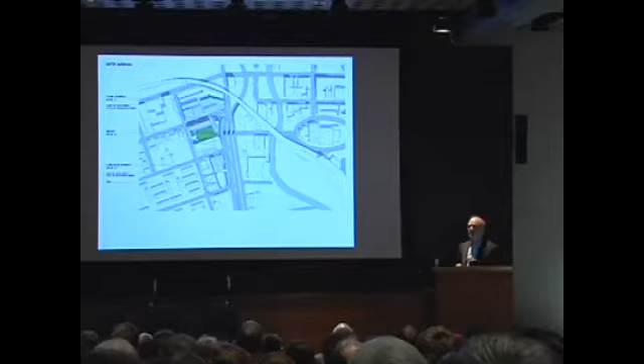And so the challenge is to think about the complexity of the situation, and think about the ways that cultural institutions can be brought together with residences, which can be brought together with landscape.

And here we see a proposal for CNY done by Koning Eisenberg, a kind of master planning idea for the near West Side, just along West Street. This sits right against the area which we call the Horseshoe, which is about 200 properties with many different kinds of housing stock.

And the competition entries, which you'll see downstairs and later on today during the presentation, are meant to go in those empty lots. And so Case Supply, which is one of the larger footprint buildings, is about 220,000 square feet.

There have been many, many ideas. Some of them have to do with using local food culture as a spur for economic revitalization. This is an image done by students at the School of Architecture with Brad Lynch.

Or this, another project which will in fact be done by Brininstool and Lynch of Chicago for the Lincoln Supply Warehouse. We see the green screen as an icon for a neighborhood which has now been dubbed SALT, a reference to Syracuse's history in producing salt, but also speaking to the unity of lifelong learning, design, arts, and education within this neighborhood.

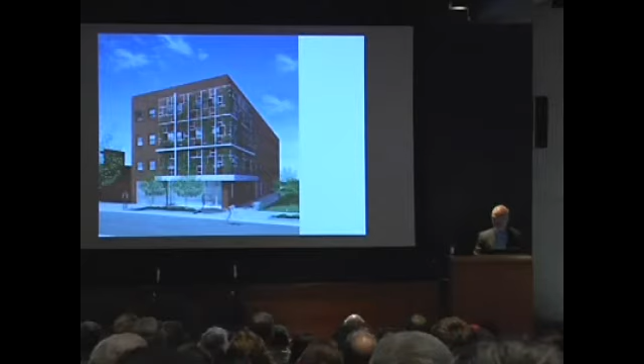Similarly, students have begun to think in more profound ways about sustainability. This was a project done with students, this is Rachel Kenny's project, in a class about the ways in which renovations can be done in a more sustainable, technologically advanced way.

And this is meant also to feed into the larger notion of what we can do on the west side through a CAR-T grant, through Ed Bogucz, the College of Engineering. Tim Stenson has worked on proposing energy-efficient houses that would go on the west side.

Or this, the Info Center by Lubrano Ciavarra, which we hope to be really a center or a hub for the kind of activity that'll happen on the near west side. This is a proposal, and this project will be going forward as well, we hope, in the near future.

But that brings us to the competition, and I won't say very much more about this because you will see all of the kind of remarkable, challenging work that our designers have done.

The notion was to see if we could bring together affordability with newer technologies, and also think about the ways in which we could approach the complexity of the post-industrial city and dealing with the rough edges of a city like Syracuse.

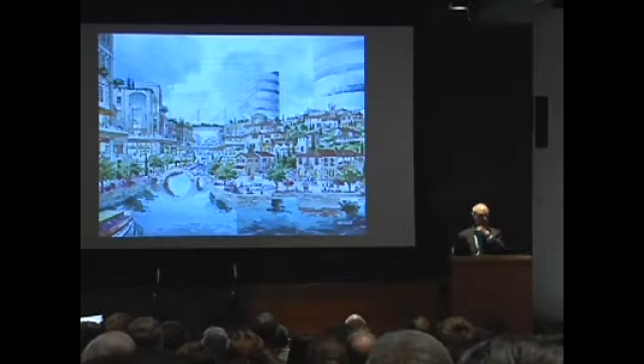This is our neighborhood. This is us, and it's very multiple. We have buildings that look very, very different. We have people that look very, very different. It's an authentic mix, and it's this kind of vibrance that we hope to maintain when we begin to do those additions.

Of course, we all love these wonderful little Victorian houses, and there are all levels of proficiency in making a bid to historic architecture in the neighborhood.

The point here is that the vision of the West Side is multiple. We will continue to have Italianate houses and Victorian houses, and we will continue to have houses by Christopher Communities, by Home Headquarters, and by Habitat. But we will want to think about maintaining densities within the neighborhood, maintaining the adjacencies which are so critical.

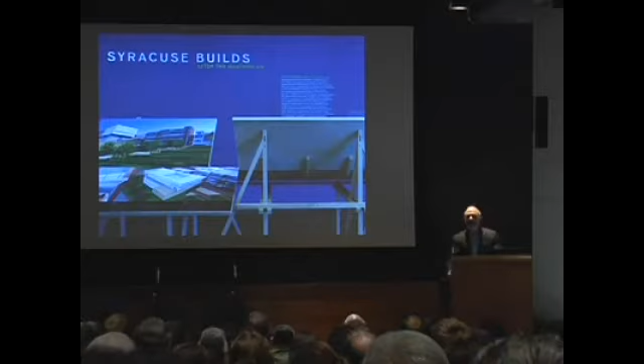I'll leave you with this. Just in the past 5 days or so, there have been articles about this housing competition that have shown up in papers in Milan, New York City, and Syracuse. This was an article that appeared last spring, and it had the rhetorical question: can architecture save Syracuse? And as much as I would like to say, as a Dean of the School of Architecture, a resounding yes, we know that the answer is much, much more complex.

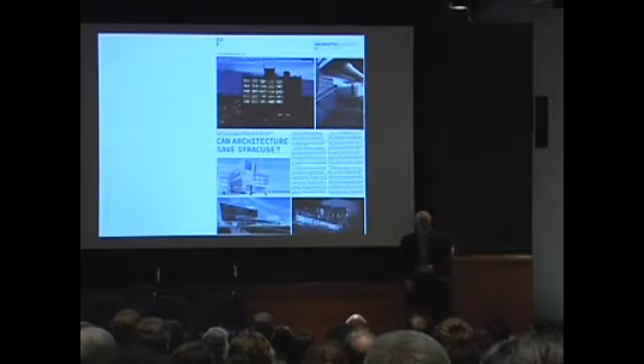What I hope is that we all leave today thinking about the ways that each one of us can participate in changing our cities and making them better. Thanks all for coming. I guess I should have clapped for me.

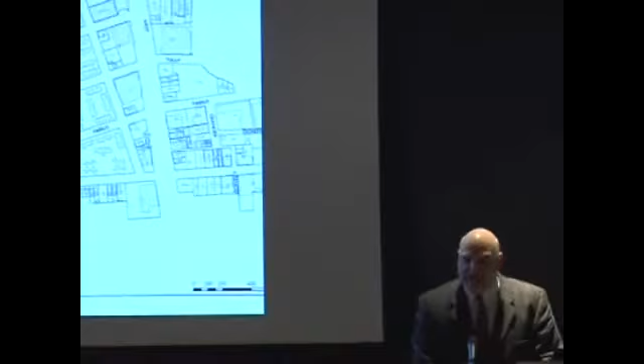In between those neighborhood assets, we had many residential properties that needed some tender loving care. Alice Mann is here, maybe you could raise your hand, Alice. Alice has been the principal architect of our neighborhood revitalization strategy in this neighborhood. Maybe calling her an architect is not appropriate in this setting, but that's okay.

When you're approaching a neighborhood revitalization plan, the first thing you've got to do is gain control of the properties. At this point, Home Headquarters now owns 71 properties in that area that we call the Horseshoe. Mike Hughes, who's also here with us today, is going to be handling most of the specs for the properties that would be renovated.

And it's pretty much an even match of new construction and houses that will be renovated.

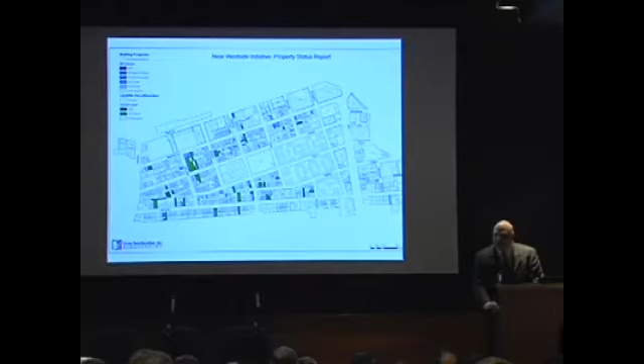But we haven't forgotten about the existing owner-occupants in that neighborhood, and we've provided a variety of programs to assist those owner-occupants, such as mini grants to give the house a fresh coat of paint or repair the porch. And working with the Center of Excellence, we've also provided these folks with assistance for energy conservation, doing energy audits on their homes and making those homes more efficient.

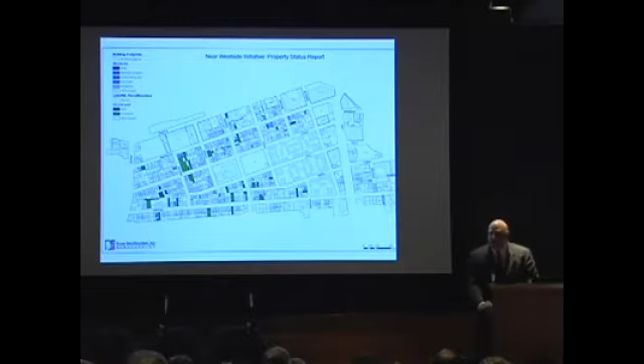Once these properties are done, both the new construction and the rehabilitation, they'll be marketed really to a combination of families and also artists. And rather than try to prescribe this, we're going to let the market play out and see how that works.

We were extremely excited right from the beginning to participate in this design competition, and now we're really anxious to go to the next phase, which would probably be to contract with the architects in question.

We committed early on that whoever won, Home Headquarters would actually build the properties. I think one of the architectural digests said they will actually build the damn things, and that's what we intend to do. In an attempt to control the costs and really improve the quality of construction, we've developed our own construction crew.

That's overseen by Dan Wright. Dan, maybe you could put your hand in the air. He's pretty shy, so I'll probably never convince him to do that. We've never found anything that Dan can't build, so I'm sure this would be no exception.

We have a core crew of 3, and Dan is also training a couple of apprentices, construction apprentices right now. And that's really a component that we'd like to do more of, particularly as we're going into some new technologies, some new designs, some new building materials. We'd like to employ more folks from the neighborhood, sort of getting in on the ground floor of this cutting-edge technology.

With that, I just want to say we're extremely excited to go forward.

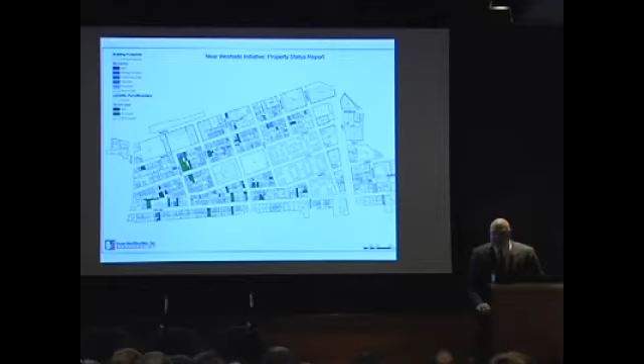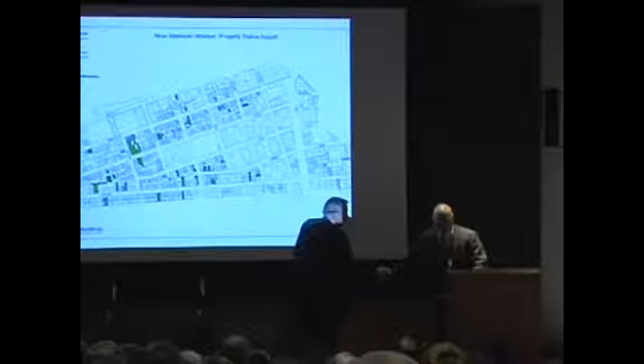So my name is Ed Bogucz. I lead the Syracuse Center of Excellence, which is an audacious enterprise that involves more than 200 firms, organizations, and institutions. This is a collaborative effort that goes back 12 years of folks coming together around the idea of creating innovations to improve urban environments and built environments.

Our partners focus on innovations in 3 areas: energy, indoor environmental quality, and water resources. And it's been really a privilege and a thrill to be involved in this project, and especially in the near West Side neighborhood.

At a high level, our mission is about promoting sustainability in the urban communities. The city of Syracuse was born in the near West Side, on the west bank of Onondaga Creek, by the first non-native settlers. And of course, this entire region is a sacred region to the indigenous peoples of the region.

So as we think about the near West Side neighborhood, we look at a region that was a vibrant urban neighborhood for 100 years, from 1840 to 1940, 1945. And the history of the neighborhood over the last 60 years demonstrates really the failed policies of the country in promoting sprawl to suburban areas.

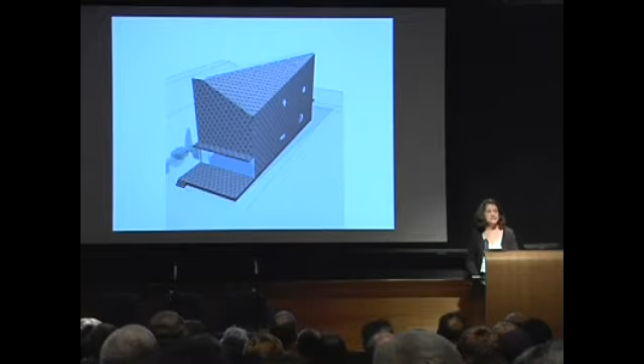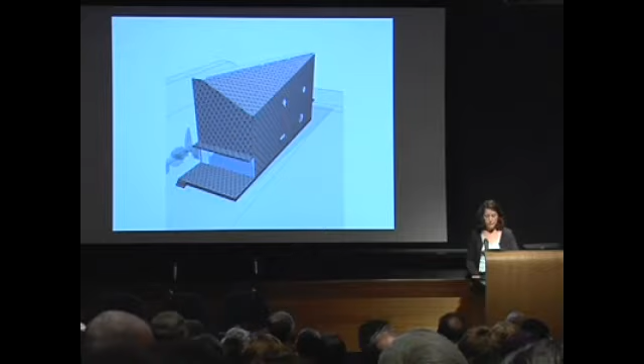The Adjaye Associates team proposes the asymmetric house, whose form is based on the transformation of a gabled structure typical of many single-family dwellings. It departs from this conventional form by advancing a monolithic structural system and a lighting strategy that directs daylight from a continuous skylight at the building's ridge line to all parts of the house's open spaces. The team refers to the house as 'a hot coal in the snow,' a metaphor for the house's thermal performance, based on thick exterior walls wrapped by a shell of clay tiles. It also proposes an underground heat exchange system that works with the Earth's ambient temperature to provide heat in winter and cooling in summer.

Inside, the concrete slab floor provides a robust surface for everyday life, and continuous glazing at the rear and front entries provides a strong relationship to the street and to the backyard.

The Erdy McHenry and Tim Stenson team's proposal is a creative response to their identified need to design what they call 2 houses in 1, as a way to manage the environmental challenge of both hot August days and cool February ones in our climate. To that end, their Lumen-Air House is what they term a machine for living.

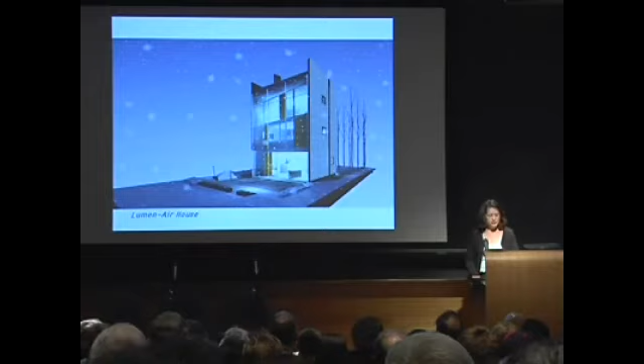In the warmer months, the house opens, flower-like they say, to filter sunlight and accept the free flow of fresh air. For the cold gray winter, it closes. The interior living spaces of the house are protected and insulated by thermal buffer zones.

Through this focus on weather-driven performance, operating costs, and an ambition to have the house form reflect its performance, Lumen-Air House aims to produce comfort, reduce consumption, save money, and important to the designers, tell its story.

To this end, the Lumen-Air House makes no pretense about blending in, at least in your immediate reading. Alternatively, the designers suggest a strategy that introduces a conspicuous, positive yet critical complement to the Near West Side, all the while complementing the housing fabric of the neighborhood. Finally, their project strategy contributes, they suggest, to the landscape of the city.

The front yard is designed to receive a birch tree bosque that, together with a green roof and rear yard cisterns, process all stormwater on site. Something we all know from the area that's important given our city's overly taxed CSO system.

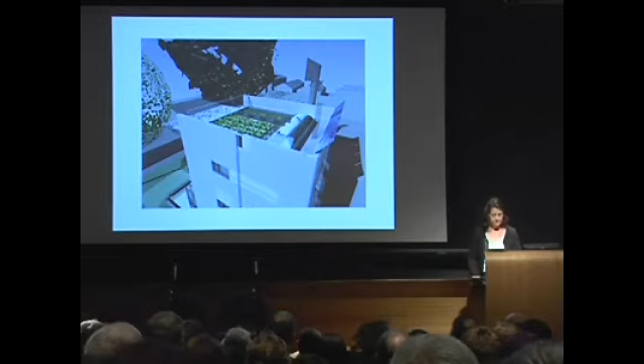The scheme by Office Da and Studio Hima addresses what the team identified as the most pressing concern of the competition: the ability to build a green single-family house for the allotted budget.

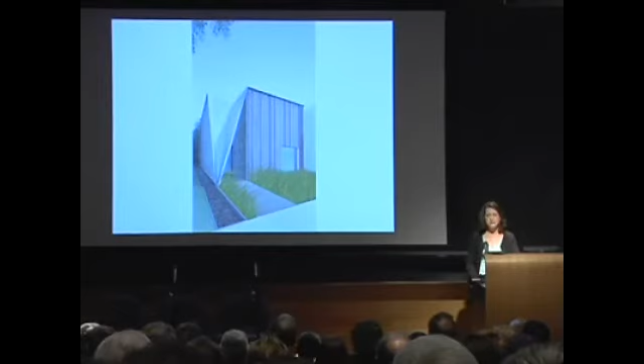For this reason, their proposal argues for what the designers call radical economies that revolve around the planning, massing, and material strategies that make what they say a dumb box smart. And perhaps most radical for some of us, completely eliminate the need for conventional heating and cooling by the use of a super-insulated building envelope.

To this end, the house is planned around some basic principles: a simple foundation and massing, and an interior that is gauged towards flexibility and used by different sized families. The strategy is to minimize construction complexity while eliminating multiple trades, materials, and assembly processes.

Thus, the foundation is a slab-on-grade with a structurally insulated wall and roof system. The slab-on-grade minimizes excavation costs while also producing a thermal mass. The SIP wall and roof system - SIP is structurally insulated panels - overcomes the multiple layers that normative construction is encumbered by while creating a thick insulating wall.

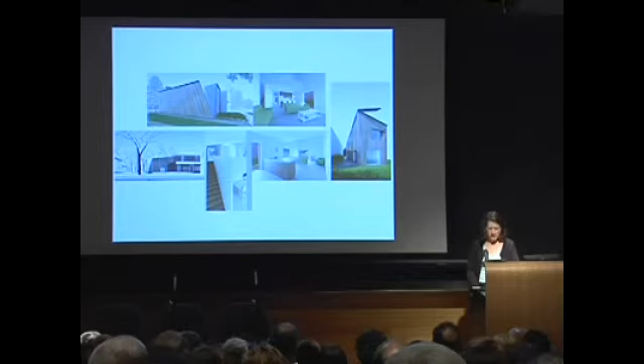The roof has a single slope, sort of an exaggerated architectural element that collects the water runoff that's for use later on the site. Beyond these principles, the team worked with a set of varied strategies, attempting to wring as much architectural benefit out of these few materials without sacrificing their inherent efficiencies.

Do It Together's project advances a house whose simple exterior envelope contains spaces of varied proportions, spiraling around a stair core, producing an inherently flexible, energy-efficient house.

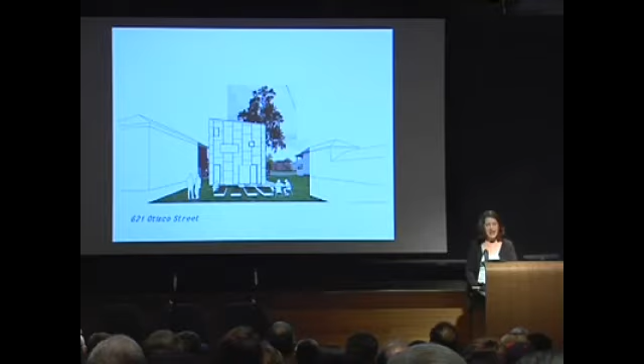Opening in the stair core frame vertical and diagonal views between different levels that give a sense of spaciousness, allow penetration of sunlight, and multiply opportunities for social contact. The house is made of thick and thin elements that work together to optimize environmental exchanges.

Designed using the Passive House Institute standards, the super-insulated and sealed envelope creates a constant, steady-state environment while carefully designed openings and overhangs opportunistically engage climate swings.

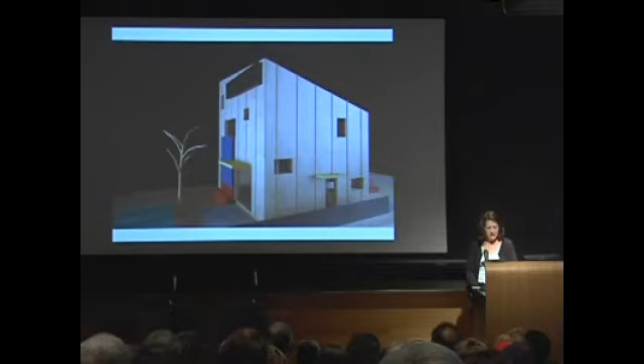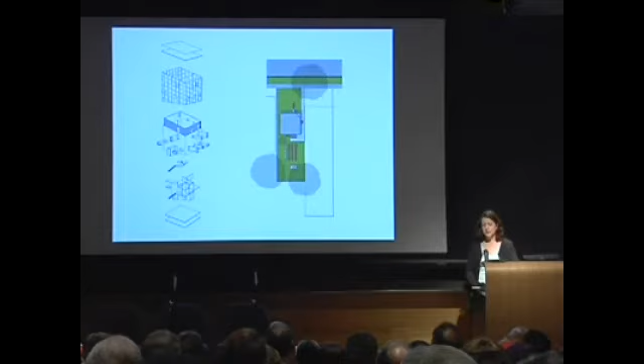What the team calls clip-ons, which are design options and features that vary the basic way the house appears and performs, allows owners to expand the dwelling when it is economically feasible to do so.

And one such clip-on sort of radically modifies the image of the house from the street, and that's the rainwater cistern that you see there in blue.

So the remaining three schemes are the winning ones, which we'll hear about from their designers shortly. I'm going to just say a few things.

The R House by ARO and Della Valle Bernheimer and team, which is cleverly named for its energy performance and the social and economic investment of ownership, i.e. our house, presents what they call an affordable, innovative paradigm for minimal energy consumption embodied in architecture that promises to nurture the spirit and engage the community.

The house transforms a typical gabled roof into a simple folded surface that recalls the appearance and scale of neighboring houses, engaging the diversity of the existing housing stock. And in transforming the gabled roof typology, the designer's aim is to provide a vision for the neighborhood that is both familiar and progressive.

Like the Do It Togethers, the R House design meets the German Passive House ultra-low energy standard, which utilizes a well-insulated exterior, airtight construction, an efficient heating system, controlled ventilation, and windows that optimize solar gain.

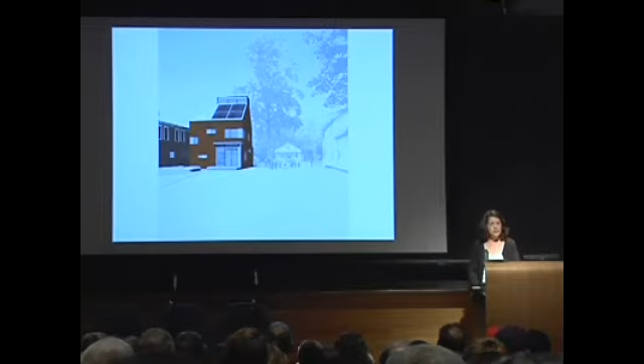Finally, TED, designed by a team led by Onion Flats, both challenges and supports the project's historic West Side neighborhood. TED was conceived as a prototypical home that could comfortably sit on a variety of lots and yet be unique to each site. Programmatically, it is easily transformable. In terms of performance, the scheme is what the designers refer to as an ultra-efficient, thick-skinned, yet light-filled and spacious powerhouse of contemporary urban dwelling that exudes more energy than it consumes, collects and recycles water, and has the ability to produce food.

Most interesting to me, TED was designed so it could be built in three different ways: stick framing, a common method for single-family homes in the region; modular construction, whose efficiency lies in building multiple dwellings with a more energy-efficient envelope; and SIP panels, where insulation properties are superior to any other method of construction. Each method has its own strengths and weaknesses, and this is just one debate I hope we have together on the panel discussion.

I'd like to move now to introducing the winning teams, or the members represented here today, as they each present their house to you. The first will be Cook and Fox, Rick Cook and Pam Campbell, followed by Adam Yarinsky of ARO and Jared Della Valle of Della Valle Bernheimer, and then finally Tim McDonald of Onion Flats and Jose Alminana of Andropogon. Thanks so much.

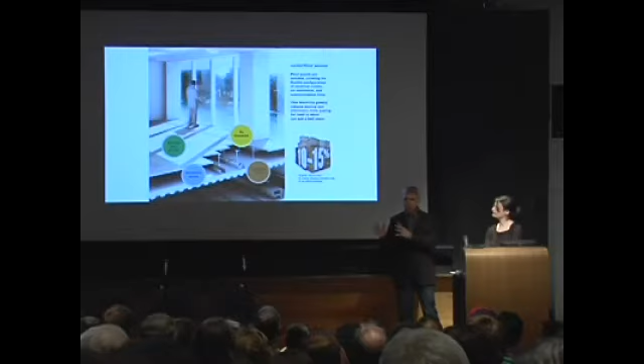The point I'm hammering is that you set out to make a difference, you set out to explore ideas, and you learn something in the process. I'm getting to a point, obviously, about our little live, work, home.

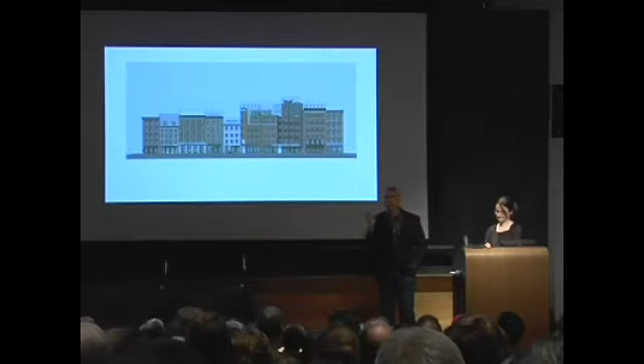But there was also a context: I'm a Bible student, and I happened to be reading Moby Dick, thinking about whaling, Jonah's whale, and Melville's whale—Melville sets Ishmael out from these very streets. So this little whale tail thing up there is actually an allusion to the fluke of a whale. This one got built, and you can see our little whale tail with the Brooklyn Bridge in the background, all done with Liberty bonds.

Here's another story: the building is completely heated and cooled from 10 geothermal wells, which go 1,500 feet down into the ground. What did I learn there? It's probably not the answer—the amount of heartache and heartbreak we put into making the geothermal work relative to other technologies. But if we hadn't done it, I'd be saying 10 geothermal wells here in South Street Seaport are the answer, it protects the historic fabric, it has all the answers. We learned a lot—they're really interesting. But the point is, every project is a learning experience; it's not an end in and of itself for an architect.

This is one of the projects that was down there—another idea about context, sitting on Peck Slip and alluding to the wood-clad sailing vessels heading out to sea, a building that looks out to sea.

And then something that really hits home for me: we're an adoptive family from Cambodia, and we made a decision that we'd only work in places we could get to and back from in a day on mass transit, with one exception—working in Cambodia at something called the Angkor Hospital for Children. We were asked to help set a standard for sustainability when people gave money away to help in the third world—how do you do it in a sustainable way?

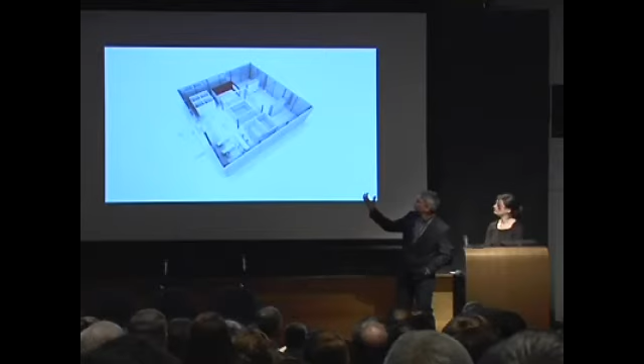I went back to this place, the 9-square grid, as the simplest form I could think of to express it. The Khmer culture at its peak was about wise stewardship of an overly abundant resource, so at the center is a rain collection area in a 9-square grid, dealing with context in another way. These are buildings that were designed to shed water, and ours was designed to capture water. At the center was this piece—the Angkor Wat temples are really hydraulic engineering, so we had this water collection device at the center.

Connecting with the street, an idea about context—meaning when you're inside, you want to connect with the street, because this is a visitor center for a children's hospital, so you didn't want to feel shut in inside.

This is in Siem Reap, building at night. This is along the tourist path when tourists are going to the Angkor Wat temples.

And now back to the live, work, home. I'm trying to do it fast and speak quickly at the same time, but I'm trying to get to a point. So now I can't help but talk about house without talking about a personal experience.

I am a child of upstate New York—sorry, Mark, but I can't help it, it's just true. I lived on a cul-de-sac in upstate New York. I lived the kind of leave-it-to-beaver life.

When we started thinking about designing a house in this particular context, I had to think about what it meant to me. So I grew up on a cul-de-sac. Within half an hour, every dad in my neighborhood started the car and drove away to something called work. And they came home to something called home. I had this very distinct idea about what work was and what home was.

After I got out of this place, I moved to New York City, and we became kind of idealistic urban pioneers, and through something called the Sonny Mae Mortgage Agency and Urban Economic Development Grant, I bought a house in a waterfront community in New York City.

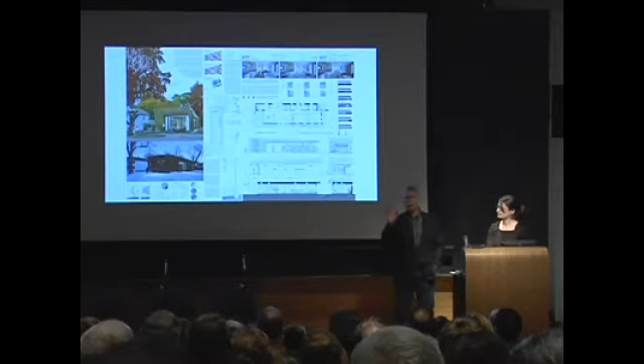So what's the point of all that? We decided that in the Near West Side, something much more flexible might be a model to test—that this idea of a home and work someplace else wasn't necessarily a formula to pursue, but we invented this idea of the live-work-home.

Pretty self-explanatory. Also, our partner Bill Browning is Haudenosaunee by birth, and we were thinking a lot about things indigenous peoples do to make sustainable places. So what we're looking at here is what we would call an interdependent community. We don't think it's a stretch to talk about cities and neighborhoods as ecosystems.

So what we have here is an interdependent community—a living environment surrounded by a working environment. The working environment benefits from the housing, benefits from the jobs, and they're interdependent. What happens when in an interdependent community one of them goes away? You have a monoculture, and a monoculture is therefore susceptible to blight.

So what we're dealing with right now is a great series of houses that's been struggling because its interdependent partner has gone away. When the Franklin Motor Company went away and then the Carrier Company went away, it lost its jobs, it lost the other half. We were inspired by a Haudenosaunee planting principle called the Three Sisters.

And without taking too much time, it's what I grew up calling the Iroquois Confederacy. They planted something called the Three Sisters. They would first plant the tall sister with the flowing hair, which was corn, and the corn would come up.

Then right after that, they'd plant seeds of green bean—they called it the sister cloaked in green, who was dependent on her other sister. There's the pole bean that would grow up around the corn.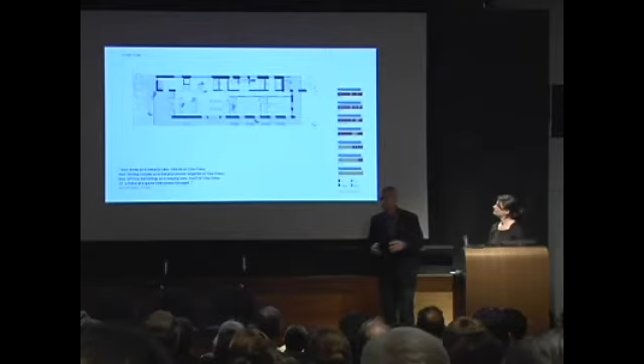So that was a bit of an inspiration for a house that could be extremely flexible. What we did was make a service run down the long side, along the top of the plan, and then a completely flexible loft down below. What you see here alludes to the Haudenosaunee longhouse, seven generations of plan configuration, and we're actually thinking maybe an infinite number.

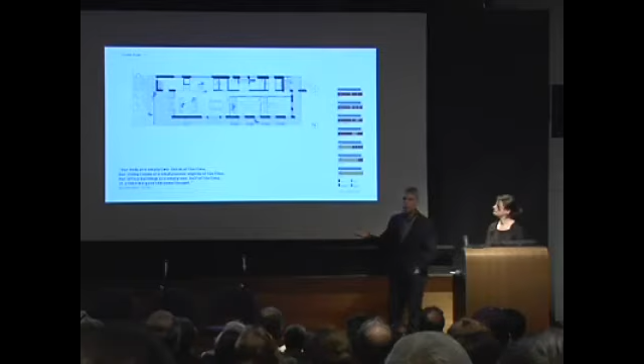For the sake of time, I'll keep going, and you can all see it downstairs later on. These are units that we hoped could be fabricated off-site, maybe even generate jobs, hopefully locally, learning about green technologies and low VOC chemicals. So much of what we're interested in is making healthy indoor environments — some of it's just not bringing stuff inside that poisons you.

This is the view of one of those floating units facing out. This is the two-bedroom configuration, the idea of hearth and home — the kitchen hearth and the warming hearth.

Another thought was, if you live and work, you could sleep in this unit and also have your studio here, as a well-lit, cross-ventilated working environment — the kind of live-work configuration. Then, even at the end of its cycle, or the beginning of its cycle, we thought it might be interesting for it to actually be a full work loft. So we drew this as a quick small architecture firm or graphics firm, as an incubator business in the Near West Side.

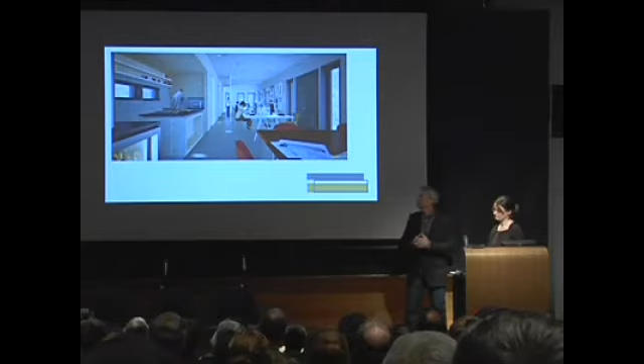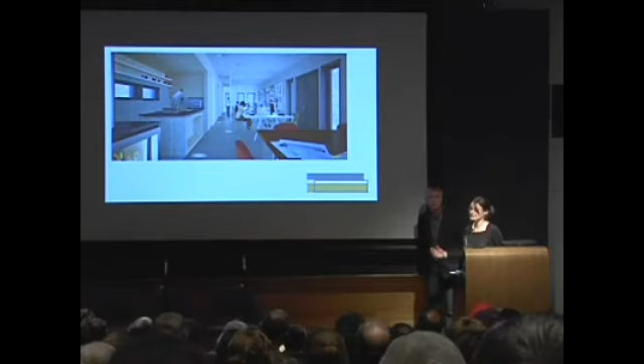One of the things we had to decide early on was the level of on-site versus off-site fabrication. We wanted to take advantage of factory fabrication for reduction in waste and quality management, so we decided to focus on the main elements of the building being factory fabricated in the form of SIPs panels — structurally insulated panels for the structure and enclosure.

One reason we didn't take it a step further and fabricate the whole building off-site was that we were coming from a material efficiency point of view. We figured that if we could do more like a flat-pack system, you're not trucking the whole building there, and you don't have to deal with the stresses and strains of a structure that would need to be craned into place just the once.

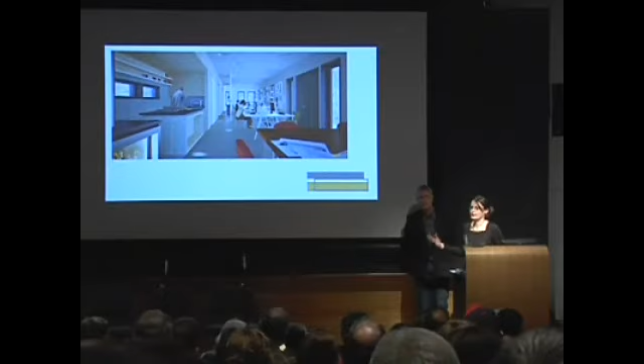You're catering for a one-off scenario, whereas here these houses are going to be here for hundreds of years. One of the advantages of structurally insulated panels is that it gives you a really nice airtight building enclosure, which reduces the amount of energy loss you'd get through traditional stick frame construction.

But one of the things traditional houses rely on is air leakage—their environmental air quality comes from the natural leakage of a non-airtight construction. So we had to address that when deciding to go with SIPS panels. The way that's normally done is with a heat recovery ventilator, an HRV, which gives you constant ventilation at the correct rate without losing the energy you would if air change happened naturally through leaking.

In terms of the other systems in the house, we went with underfloor radiant heating. One reason was the flexibility it gives—we didn't want a two-bedroom house version where you'd have to rearrange ductwork, wasting time, money, and materials to turn it into a studio. So radiant floor made a lot of sense.

The other reason it made sense was it's a water-based system which could hook up easily to a solar thermal system on the roof. For the solar thermal system, we figured the most efficient option of all the systems we looked at was evacuated solar tubes.

They're one of the systems that actually work pretty well in this area with very little sunshine—PVs not so much. There were a few other technologies we looked at, and this seemed to give us the most value for money, both in financial investment and in material investment and what we're putting out there.

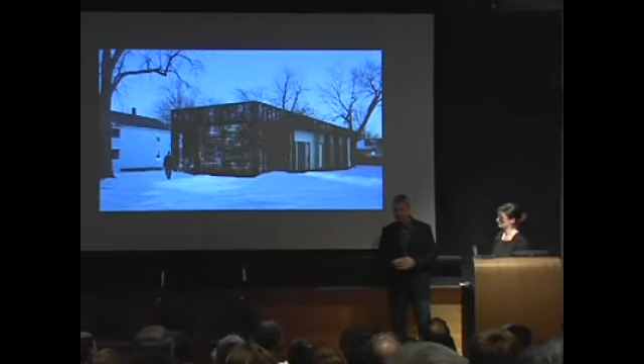So we thought we'd join this competition, design a cool modern beach house, and apply it someplace else. We got suckered into the whole near west side thing, got totally wrapped up in it, and one interesting thing that happened when we were done was that we did think there were places where this could be replicable—Troy, New York, Schenectady, New York, Rochester, New York. There are a whole series of places where these beautiful interdependent communities could use a live-work home.

So quick ideas, there's a term called biophilia that's extremely interesting to us, and it's an extremely important term to us. Places where you feel good that use nature as a way to make human habitation feel good. The idea of planting seeds of biodiversity, we're not saying do 200 of these. We're saying that this is well placed throughout the community, and I think it could help.

And people do see one-story lofts as commercial buildings that exist, like the corner deli, and it's not weird to live in the converted curtain shop down the street.

So we thought, why flat roof? Is this a contextual thing? I think it is. If you walk around the community, there are small one-story taxpayers that exist in all these communities, and we're alluding to that and the reuse of those.

So thank you for your time. I think I went over, but we're really excited about working on the project. Thank you.

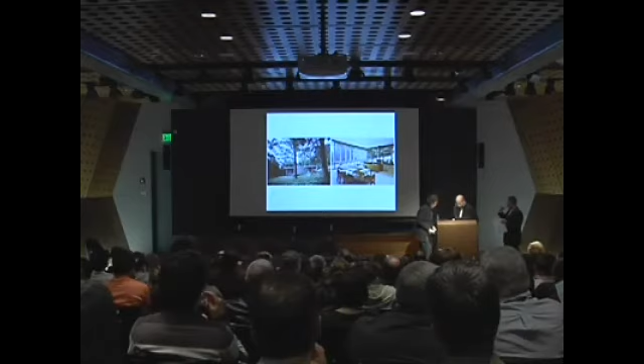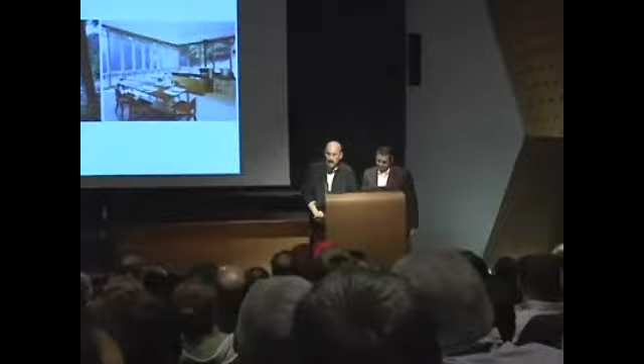I'm fascinated after this. I'm Adam Yarinsky, principal of Architecture Research Office, and I'm joined here by one of our collaborators, Della Valle, who's a partner at Della Valle Bernheimer.

We're incredibly excited to have participated in the competition and to be here, having the opportunity to present our thoughts and hear about the other project.

I need to find out where Rick grew up, because I also grew up in upstate New York on a cul-de-sac. So, in fact, one of the things that worries me about this competition is, having grown up in the Albany area, I feel that I'm being somehow unpatriotic by contributing to the future prosperity of Syracuse. But maybe there's enough to go around.

I don't know. We wanted to start by just introducing a little bit of our work. My firm has been in practice for about 15 years. We've done a very wide range of projects, but I'm showing just a few to show the diversity.

We got our start, as Della Valle Bernheimer did, by doing homes and apartments for individuals. I think having a sensitivity to creating place and the rhythms of how people use their home and apartment, and qualities of light, the passage of time, the seasons, are all things we've thought about for quite a long time.

In fact, one of the things that's always troubled me has been the perception that this is solely available to people who have means because they can afford to pay architects. Nothing could be further from the truth. So for us, it's absolutely thrilling to create a project that embodies these qualities and delivers them to an entirely different constituency, but in a way not different at all, because we're all people.

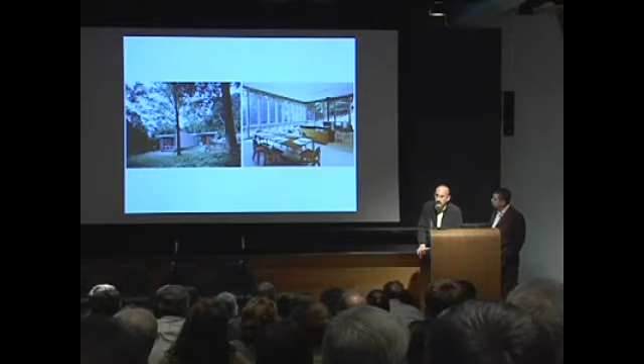Most of our residential projects, really all of them, as well as our other project, are very much about connecting people to place and to site. This is a home we did in Telluride, Colorado, an entirely different context, but again engaging qualities of the site, both through material and form and space and orientation.

A house we did in Martha's Vineyard using wood, but again, interconnection of the house with its site, and the qualities of daylight and view intrinsic to the experience of inhabiting this very special place along the water's edge.

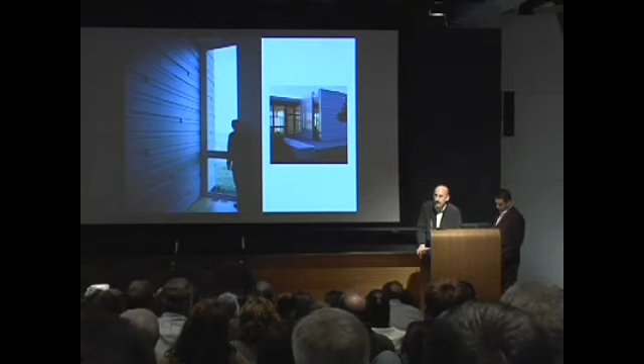We've done a series of different institutional projects. We were responsible for the renovation and addition to the School of Architecture at Princeton University. The pre-existing condition is on top there, and that's the new, most visible part of our renovation.

Very much in the institutional work we've done, as in the other projects, we like to engage existing conditions with the new, to create a new totality, to look at things holistically and form something that works as an entire composition, not only in and of itself, but also with respect to the surrounding campus context. This sits within a very historic campus.

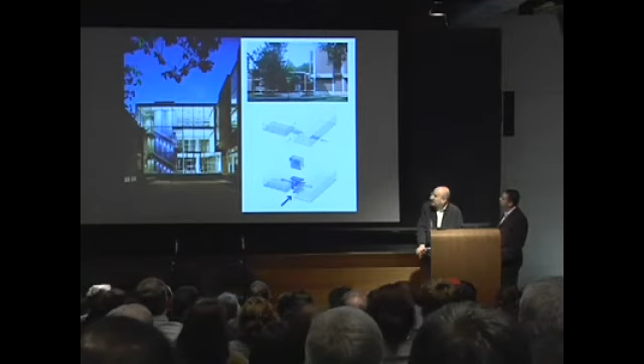And then for something completely different, we're also the architects of the Armed Forces Recruiting Station in Times Square, probably our most visible structure, not far from One Bryant Park. This is about how to create a building that participates in an incredibly unusual context and engages qualities of both the identity of the institution, the identity of the place, and the qualities of this very unique setting in the heart of our city.

So, like most young practices, we start our work by working with our family. This is for my business partner's absolutely insane parents. I can say that because he's not here.

This project is exciting for us because it was an early project for us, but also begins to address some of the dilemmas that we found in the West Side, which are really about how do we address issues of context and issues of perception in contemporary architecture.

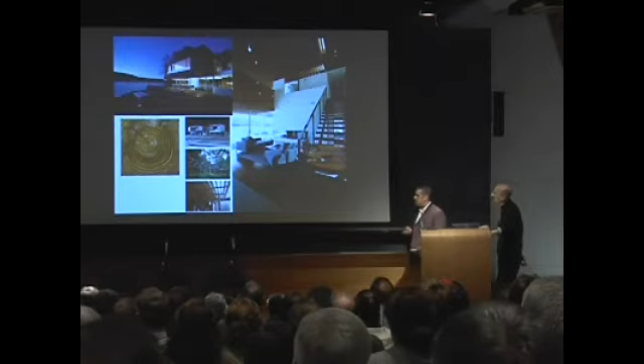This project is interesting because it's a collaboration. We collaborate very regularly. This was a collaboration with Guy Nordenson. And it was this idea of the tree, lakefront cottage, small home, and how this idea of trees gets reinterpreted structurally into an invented structural system.

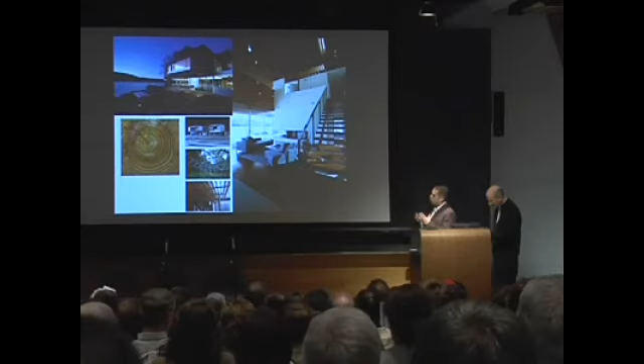You can see this obvious image on the left of tree rings, and our interpretation of this tree as structure. The interior space is actually made of a long span plywood structure, which sounds like a bit of an oxymoron, but working with Guy, we developed this structural volume of space like a tree canopy that opens up in the center of the house.

This project is a small garden pavilion. I show this because it's in the same spirit as the lakefront house. This is about ingenuity. This was built for $12,000.

It's a tiny little garden pavilion. The word pavilion comes from papillon, which means butterfly. This transformation of the word butterfly into a pattern of physical butterflies creates this cocoon-like space.

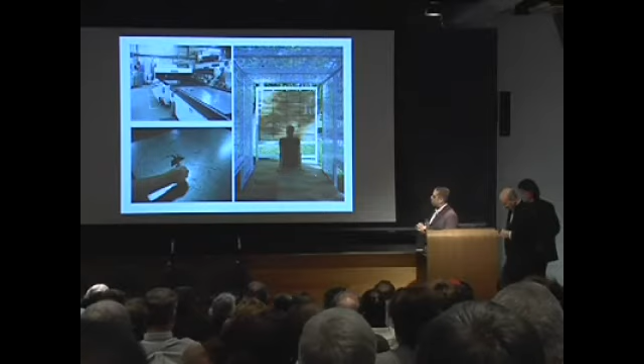It's this kind of investigative, iterative process that our office goes through to find where the best place to start a project is, and how that marries uses of technology for purposes of fabrication with the romantic idea of contemplative space, and how those shadows and light create a different type of environment, something detached from historical precedent.

So this project that we're working on for the West Side was really interesting to us because we had just worked on and completed one in Brooklyn, which was similar in nature.

This is an affordable housing project in East New York. We had 9,000 applications for 9 houses. There's an extraordinary demand. We built these for $108 a square foot in Brooklyn. We can bring that here.

I think what's interesting is that there's this really bizarre context of this patchwork of aluminum siding, these sort of Archie Bunker-ish type houses that happen here, and there's this kind of patchwork. As the developer, this was our first development project, and it was really this idea that affordable housing requires more thought rather than less.

As a developer, we brought in three other architecture firms to collaborate with us: Architecture Research Office, Lewis Tsurumaki Lewis, and Briggs Knowles. We approached this as architects and developers, recognizing that this is the single largest purchase someone will ever make, often their first big purchase. We can't make mistakes. So we developed two different zoning and contextual characteristics and a material palette.

That got deployed in a variety of ways, and it was incredibly exciting and rewarding. The houses are as sustainable as one can be in that budget category. Everything is locally sourced. We worked with local collaborative workshops to train workforce to build these houses, which proved to be a huge advantage in terms of how little vandalism we had during construction.

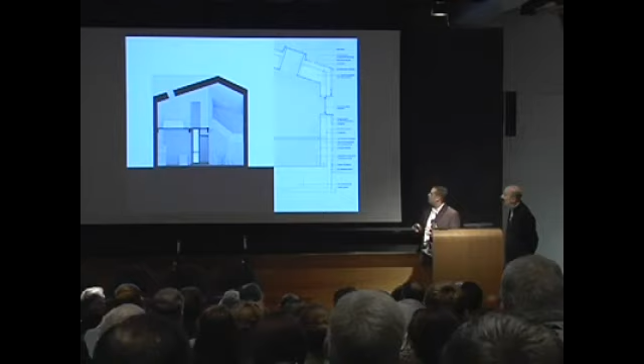So the basic formal proposition of the house—I'll skip past this. This is just quickly the building envelope, you can see the building technology. What's interesting is that it's a straightforward 2x6 wood frame construction house with EPS foam on the exterior, creating this super thick wall assembly. There's insulation under the slab. The interior floor is a lock deck construction, chosen for material qualities, but the building envelope technology itself is really straightforward.

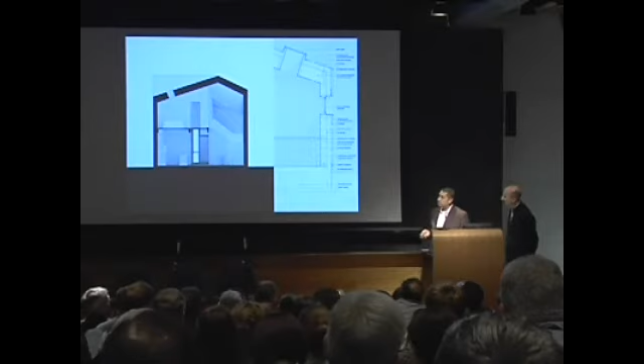So how did we arrive at this house? It wasn't our goal—we have literally thousands of models of the house that we built to transform the typical gabled roof into this form. But we found that sometimes the simplest responses, historically, are accurate for a reason: they are efficient. So we transformed the existing gabled roof, and in the twisting and transformation of it we found we created massive amounts of efficiency in the planning.

You create two high spots in the ridge, which become occupiable room spaces inside. And the arrows you see on the form on the right show where we start to actually amputate parts of the building envelope which become inefficient or unnecessary. The overall house is only 1,200 square feet.

It's a very straightforward house—just living space, an optional room. Upstairs is two bedrooms, stacked bathrooms. The opportunity is, in the future, to add a vestibule and create this into a two-family house. And if you needed a four-family house, you could simply fill in the void, which is the double height space.

Another idea of long-term sustainability, which is sort of adaptive reuse of an existing structure, so the investment in the envelope goes a long way—30, 40 years out, for empty nesters, two-family houses, etc.

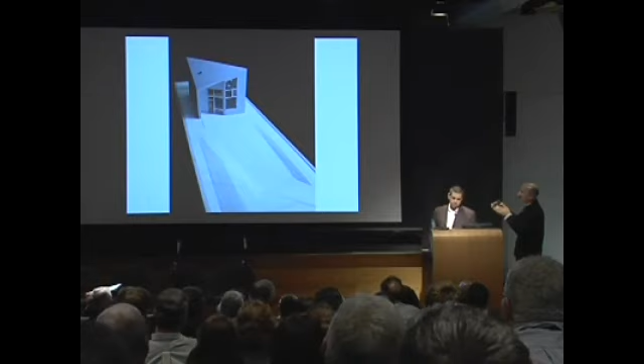I'm going to fly through this. We thought a lot about the character of the house and the neighborhood. I wanted to respect the street edge, have all the drainage on the site contained within it, and use the cut from excavating for the house to create a berm on the back, which helps enclose the space and create a little more privacy as well.

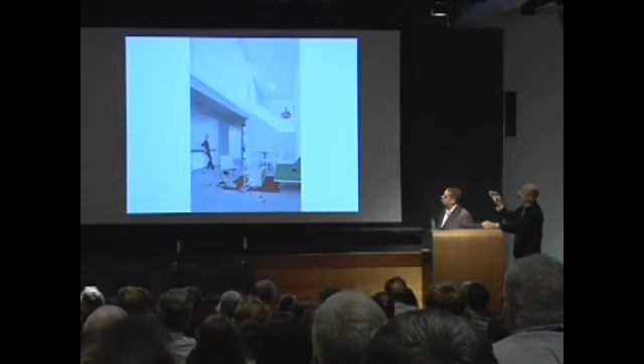On the interior, these are a few views taking you inside, making use of whitewashed plywood, exposed polished concrete floor slab, and lock deck, which is a structural spanning wood decking for the second floor. We also use polycarbonate as a material, sometimes as a detail, in this case the handrail at the stair, and sometimes as a way of borrowing daylight from one space to the other, so it forms the partition between the master bedroom and bedroom on the second floor and this two-story space.

Very important to the interior is, as compact as the exterior is, we wanted to emphasize the sense of openness and connection to the exterior, which is very challenging to do in a cold climate. We're not in Southern California here, so this is a way of strategically locating windows—you're always getting a glimpse from one space to the other. Things feel more open, especially in a place with a cold climate, where you may be indoors a long part of a long winter. This is a view from the stair looking down to the backyard.

We felt it was very important—one of the great things about why we chose a more compact form is that when you own your own property, you have the possibility of having a yard, which is your place to do a variety of different things. You can garden, you can go skating, you'll see in a minute, and all manner of things. It was very important to us that that become a palette and a possible way of a person occupying the site. This image you already saw, and here's a view again from the back.

I spoke briefly about economic variability and community. I think Rick said it right—variety is important. Family structure variety, prototypes for different types of building housing, whether it's two-bedroom or two-family or multifamily housing, is really important. This investment we're making into the project is a conscious decision to invest more than the value of the actual houses, and to think about how we can make that investment last as long as we possibly can.

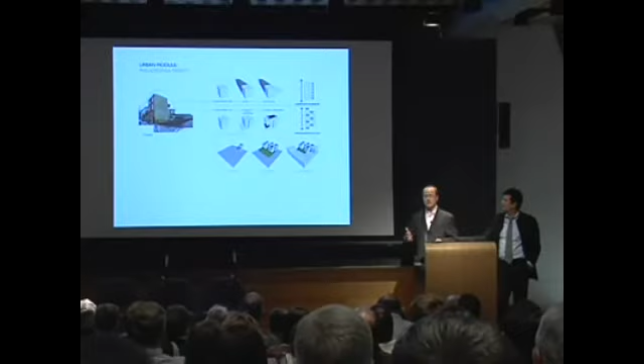We want to show you quickly some of the ways we've approached this—we're from Philadelphia, and Philly is an amazing city. We believe this issue of context keeps coming up in lots of really interesting ways. The way we've addressed context in previous projects is by discovering these urban prototypes, these prototypical forms and units that make up the majority of Philadelphia.

In this one project, Philly is famous for its Trinity structures, these Father, Son, and Holy Ghost houses. This is one of those trinities that we then pull away and begin to reinterpret. This is how it's typically dealt with in a row—the trinity has turned into the row with extensions on the back over time and so forth.

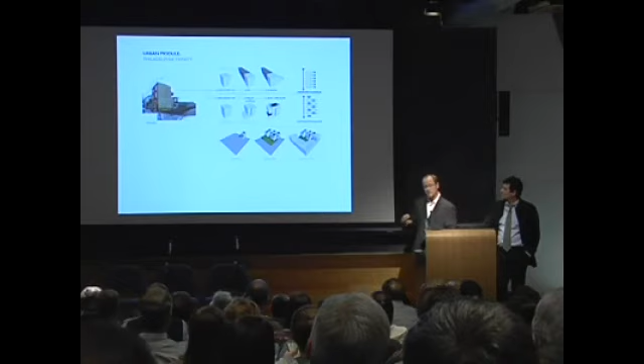We said, let's work with this from a contextual perspective. We don't believe in a superficial sense of making things fit, but more fundamentally, from an urban planning and typological perspective, let's look at the fabric of the city. So we pulled this out of its own context and created this free-floating trinity that made up the community we call Rag Flats, because it was an old rag factory.

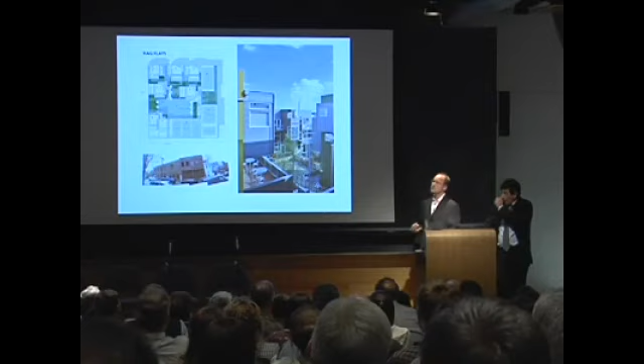This was really our first foray into sustainable building. My brother Patrick brought all of this to the front by saying, I want to generate power on this—and then he got himself licensed as a solar panel installer. Then he said, I want to save water, I want to collect all the water, and he figured a way of collecting it all. Then he said, I want to heat and cool these buildings differently, so we've never done anything other than radiant heat in these units, because in all our projects it makes sense to heat surfaces rather than space, rather than volumes of air.

So this is one of our first projects that really demonstrates that attitude about the city.

Just very quickly, the sky and the earth are great inspiration. Very simply, we can generate a lot of heat and power from the sun. We can store it in the ground, we can disperse heat into the ground in various ways, we can collect anything that falls on our sites. Urban environments are naturally sustainable, so that means try to manage everything on site—that's what we try to do with all of our projects.

So those are kind of just some basic introduction into how we approach the environments in which we work.

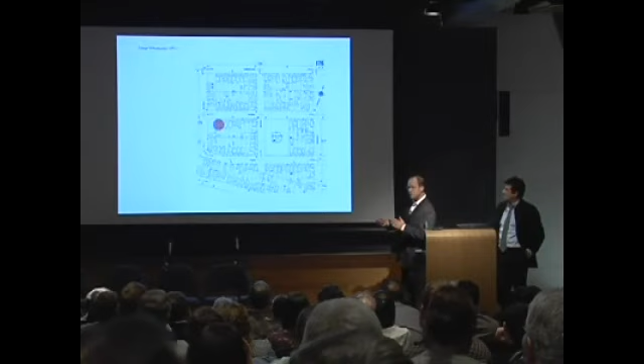Again, context for us begins with the urban form of the neighborhood. Very quickly, in 1911, just a quick glance, you see density here. You see that buildings front the street generally. The previous lectures talked about that relationship to the street, Rick for instance. They fill the site from edge to edge. There's a density that's important to the very concept of sustainability.

Today, if you go back and forth and look at the same sites, we forget about density. We start to take up two sites. We start to pull buildings back from the street. But what we felt was important from a relational, contextual perspective is to deal with those fundamental givens of the context.

Again, we were asked when we presented the project a couple of weeks ago, what's your approach? What can you say about context? And the only thing I said was, well, the context is diverse. So in many ways you could say anything goes. But I think it's more important that we open that up a little bit.

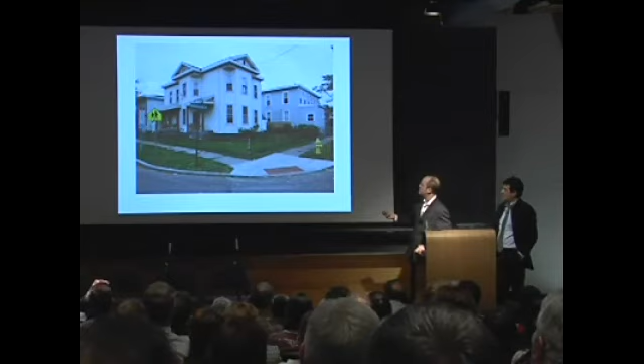As far as I'm concerned, it's one thing to talk about materials, form, pitched roofs, scale. But it's another thing to begin to look at the things that really make the neighborhood a neighborhood, and its relationship—again, the building's relationship to streets, porches, diversity in materials, diversity in form.

Again, this is all about community as far as I'm concerned. This is about people being connected to a street and a conversation and a passerby.

So that's one of the things that we took on immediately with the site. Very simply, we said—I'll have Jose take it from here after I talk generally about the plan—we just said, let's put our building in relation to the street, just like the other homes.

Let's maximize its position east and west, and consciously let's make this a square so that it's non-directional, so that it has the ability to be repositioned and reconfigured in different sites and different contexts, but take on a different character. And let's make it incredibly flexible.

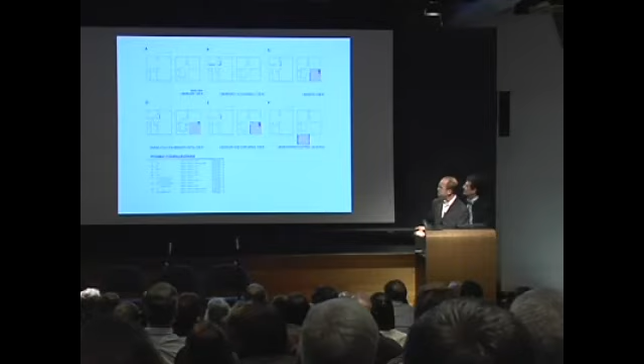If you recall the two maps that we showed you before, you see that the earlier 1911 map had a lot more density.

It also had the possibility of having houses in the back of these lots. We have a 100-foot plus deep lot, and there were two questions for us: if we have to keep to that pattern, how do we make the street livable and alive? And if we don't, which means most of the site is open, how do we maximize the performance of that site? And if not, can we actually place another building? Because what we want to do is increase density.

The solution of the problems of the 21st century are in the cities and nowhere else. I think that's something that we all know about and we know it very well.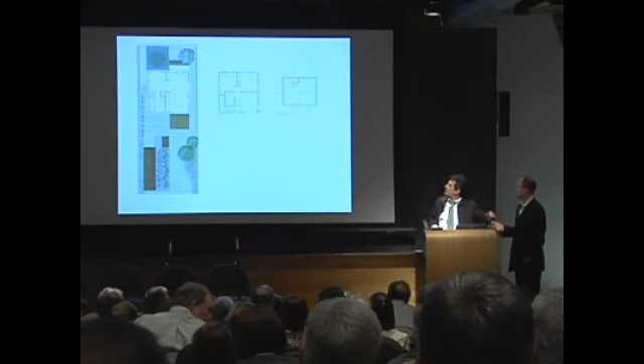So what does it mean for us? It meant that we will fit the house here just far enough that we can actually get something very important: a handicap access to this building that is elevated 18 inches for environmental reasons, to deal with climate conditions, to deal with the volumes of snow. So in the front of that building, we have what?

We have a productive landscape in the form of rain gardens. It's a rain garden that actually captures all the water that falls in the front of the house and uses it as a resource. The back side of the building, which in this case faces south, opens to the sun and uses that energy to the extent possible. The building takes care of the solar orientation and has something to do with the pitches of the roof, which is actually a vernacular adaptation to a very specific bioclimatic condition of this region.

But here, what we're proposing is that we will capture every single drop of water that falls on the site. We store it for reuse on the site. And in addition, we can take the wastewater from the site and process it in the back side of the building in a form of constructed wetlands, which is simply the way, years past, human beings dealt with waste, which is in nature a resource for other species.

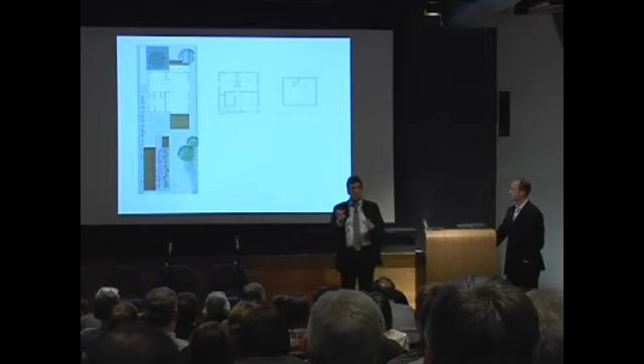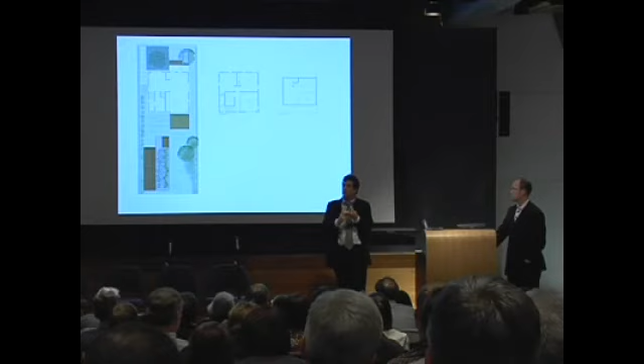So what we're doing here is taking water that is quote-unquote wastewater, and we're using it to support a series of plants that actually provide oxygen, provide beauty, and provide all kinds of environmental services, and actually take that water away from the overtaxed CSO, combined sewer system of the city of Syracuse, which is eminently replicable throughout many urban areas in the United States.

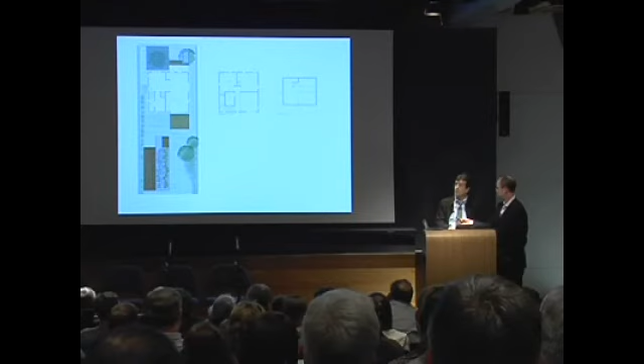Just to quickly run through the next set of slides. This demonstrates, in a similar way as the last project, the flexibility and the ease of transformation, which was also very important for us. How does this dwelling transform over time from an 1,100 square foot unit? We went with the absolute minimum 1,100 square foot unit up to a 1,363 foot dwelling.

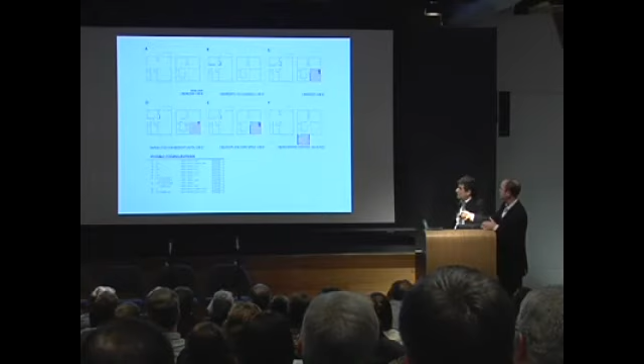With ease, it can become a 2-bedroom, handicap accessible unit by building this one wall for a ground floor bedroom. It can become a 4-bedroom by building that one wall and filling in that triple height space, and so forth. And lastly, we build into the project the foundation for this addition that can be built over time, accessed from the landing of the stair. This is a very important dimension of our project.

All heating and cooling, all heating and hot water is provided through evacuated solar tube panels going into a small tank and a very high efficient boiler with radiant heat.

This is the constructed wetland that Jose spoke of. We are understanding this building as a building with a skin, and literally, this is a rain screen system where the skin of the building is pulled away from the waterproof membrane of the system, and that skin can be changed out over time. But what was really critical for us was this.

We looked at not just how you build this, but why you build this, and what are the varying values of building one way versus another. For instance, in stick framing, the cost of construction, relative between stick, modular, and SIP panels, it's probably one of the least expensive ways of building. One of the most expensive ways of building is with SIP panel construction, and what do you get out of it?

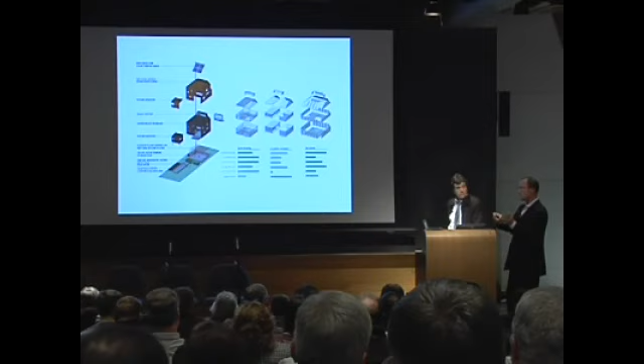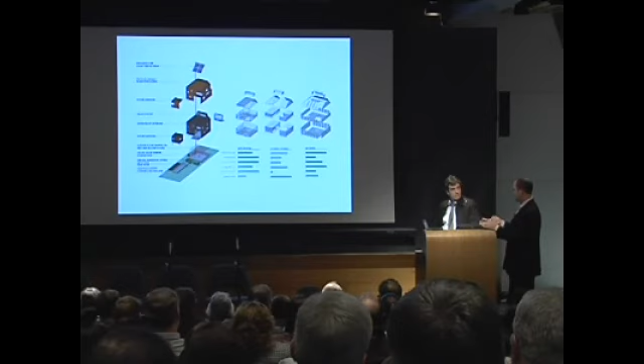budgeted and built in a totally conventional manner with 2x6 construction and conventional insulation values. With the energy modeling and LEED certification checklist we've done, we've invented a new standard, like LEED titanium, 15 points over LEED platinum. So it's actually overkill for this particular building in this context, specifically because this is the only one that really supports the local community quickly.

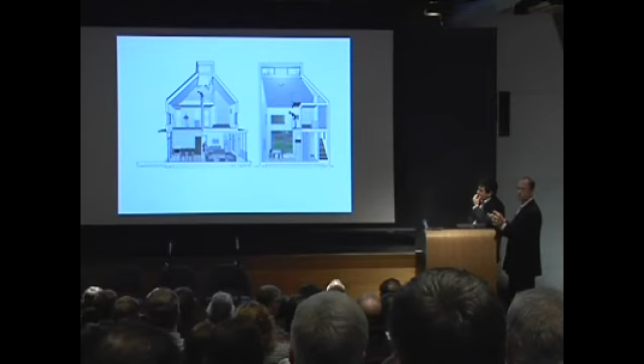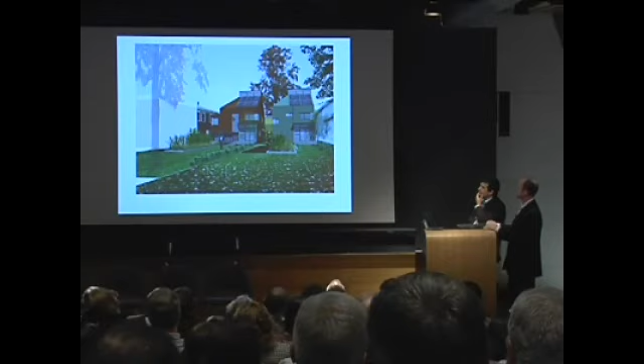So again, the form of the building not only supports the solar panels here on the south, but it also creates a solar chimney for the building to eliminate all cooling in the summer. This is it in the winter, and this is it in 5-10 years with the addition on the back, the constructed wetlands. That's the concept of the constructed wetland with effluent moving through here and becoming potable at the end. We're thinking of using recycled granite curbing, which abounds in the city of Syracuse.

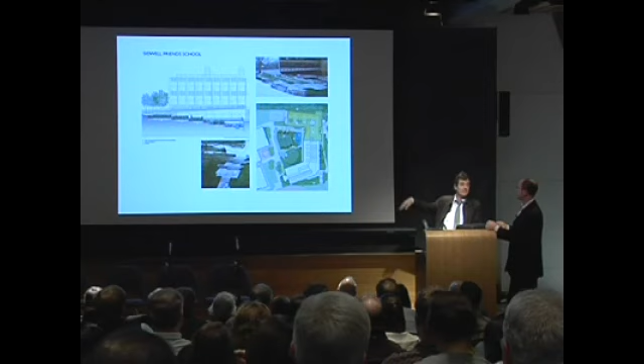This is a project that we completed - this is just to demonstrate that this is doable, eminently doable. It is built in Washington, D.C., and yes, it is LEED platinum, and yes, the Obama girls go there as well. So, yes, we can, and yes, we did it.

I'll just go through these last images quickly. This is about how you can change your coat depending on the context or the client. So thank you, and I think we're buying a building in Syracuse. We're moving there.